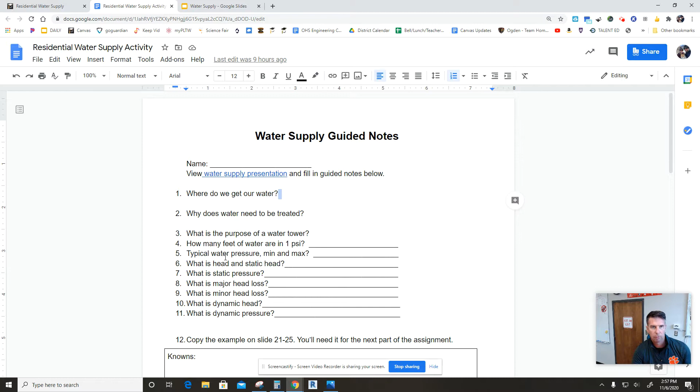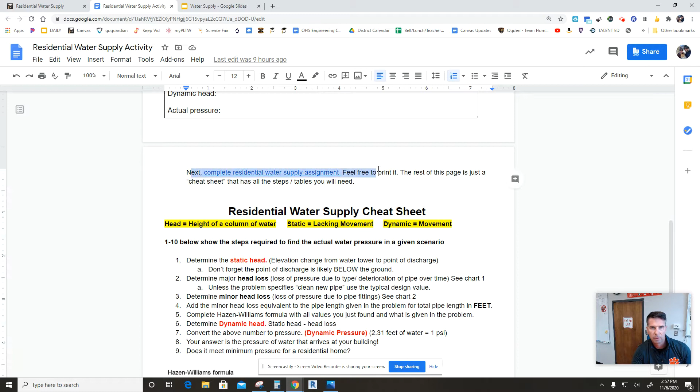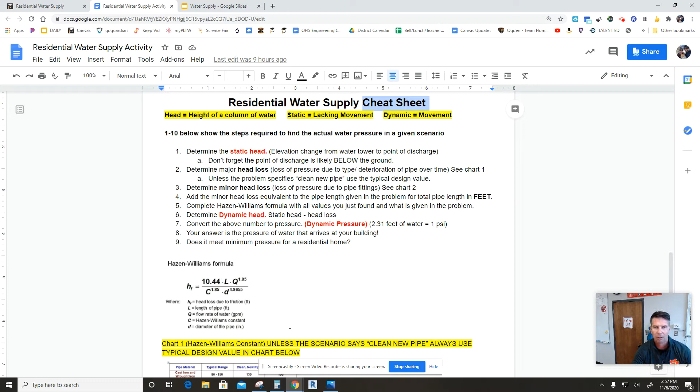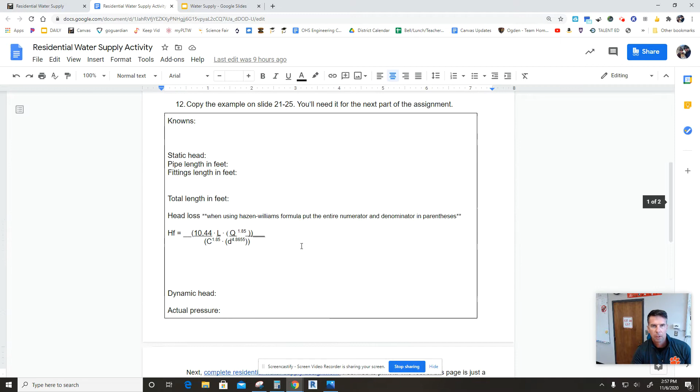So the purpose of this video is to show you what you're going to be doing and walk through the math portion. You're going to go through these guided notes, work through this example, and then do this assignment. Below is a cheat sheet, a step-by-step guide. This math is not hard at all, but I'm making this in case someone's not here. I want to go through one example with you. So if we go to the water supply presentation, I'm not going through the whole thing, I'm fast forwarding to this example, and that's what I want to walk through.

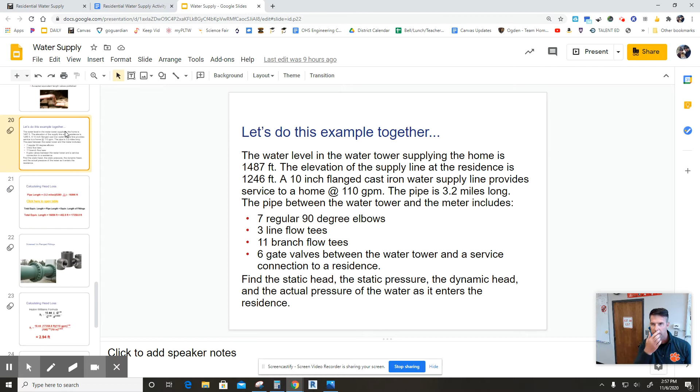You're given all this information about a water supply system. I'm assuming you've already gone through the notes. This is not going to make a whole lot of sense unless you go through the first part of the guided notes to get that background knowledge, so please do that first. We have our elevation difference, our type of pipe, the gallons per minute, how long it is, and all the different fittings. The goal of all this is to find the pressure at your faucet.

So that's what we're going to go through. We know it's 3.2 miles, and we're going to convert that to feet, 5,280 feet in a mile, of course. So here's our total feet.

Great, easy. Now the last slide gave us all this information about all these different fittings, and take note, it's a 10-inch flanged cast iron pipe. Let's find the first one, 7 regular 90 elbows. Let me back up for a second, because it says flanged pipe. Screwed fittings you see in much smaller diameter pipe. Flanged fittings have these really big bolts and nuts that hold pieces together. This might be a 2-foot or 3-foot diameter pipe, a really large pipe. If you've seen the big pipe in Ogden Canyon that delivers our drinking water from Pineview, that's a huge pipe.

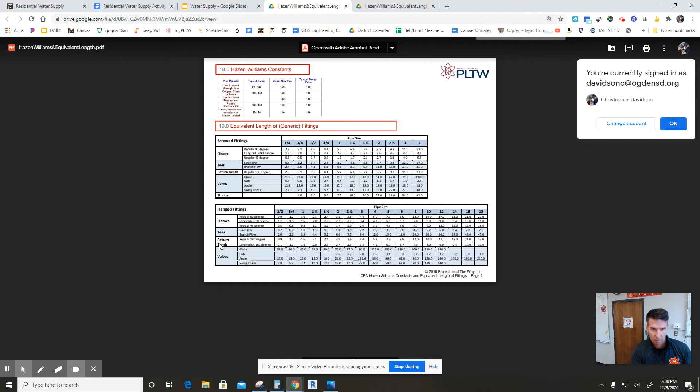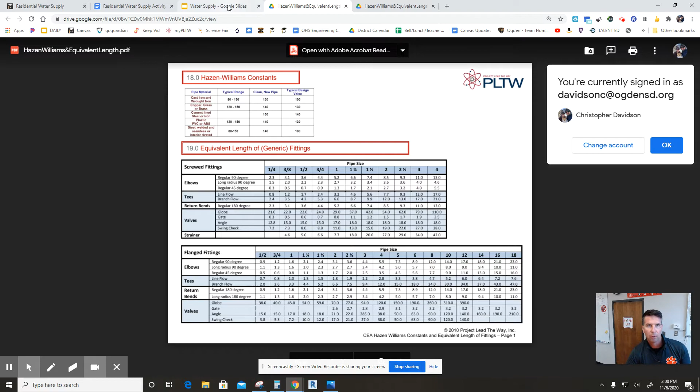So back to my table, notice flanged fittings here, screwed fittings here. It was a 10-inch, and right here - here we go. Here's our diameter, 10-inch, regular 90, just like a 90-degree bend, and that's going to add 14 feet to our pipe. If we go back here, there are 7 of them, so we do 7 times 14, and you're going to do that with all of these different fittings.

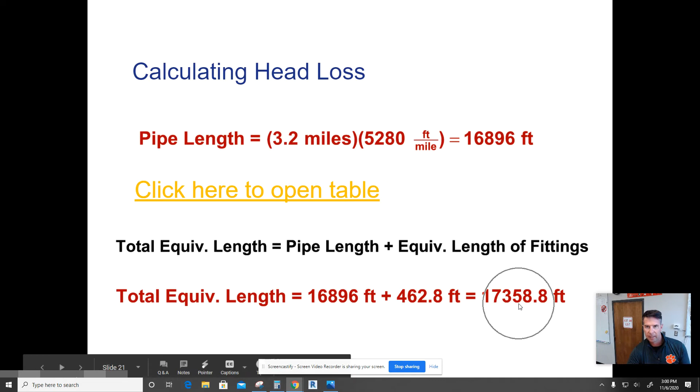So then what you do is take that 16,896, you're going to end up with 462.8 feet, and add that to our total length, because all those fittings end up creating basically feet of pipe. We're going to make turns, we're going to make 90s, and it's going to reduce the pressure and the force, so we have to take all of that into account.

So this equation looks ugly, it really is not. It's our Hazen-Williams formula, let's just jump in. 10.44 times our total length after we accounted for our fittings, that's this 17,000. Q was given, that's our 110 gallons per minute, raised to 1.85, easy. The denominator is what type of pipe we have - I'll show you that chart in just a second - and the diameter of pipe, and these two exponents are just constants in our equation. Let me show you.

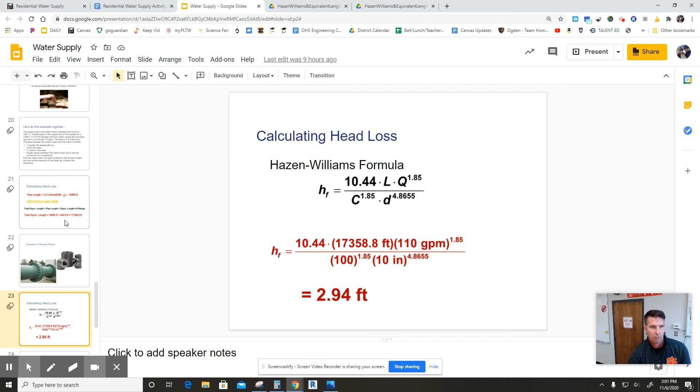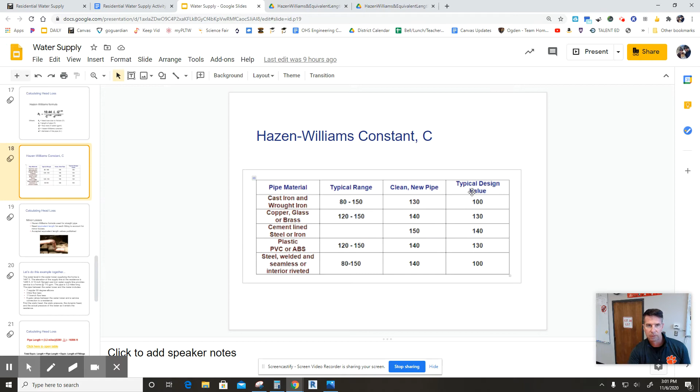So it said cast iron pipe, let's talk about that. Here we go, cast iron pipe. Unless the problem specifically says clean new pipe, then we would use this value. If it does not say it, and our scenario did not say clean new pipe, then we're just going to use 100, and that's this typical design value. Let's see where we were - yeah, see, cast iron pipe doesn't say anything about being new.

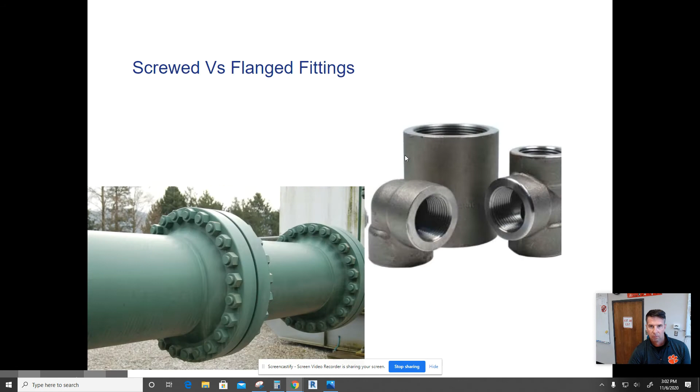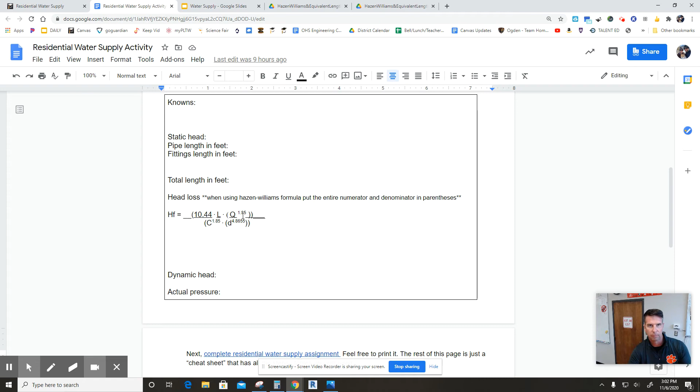Okay, we did our Hazen-Williams, did some ugly math, and got down to 2.94. There are some quiz questions on this, make sure you know how to do it. Back in your guided notes, right here - if you put your parentheses in exactly like this shows, you can get it right on the first go in your calculator and not have to do the numerator separately from the denominator and then divide them. Okay, getting sidetracked, here we go.

All right, we got 2.94. We're almost done, that's the hardest part. Also in the problem, it gave us the height of our water tower, and the elevation of our water tower, and the elevation of where this house or whatever is. So we take the difference and we get 241 feet. We need to convert that to pressure. Right now this is what we call static head, we need to convert that to pressure. So we convert that and we get 104 psi. 2.31 feet is equal to 1 psi.

So we take that 241 - this slide's a little confusing - we take that 241... yeah, you can really omit this step actually. Let me back up: take the elevation difference, then subtract what you got from Hazen-Williams. There's that 2.9, you get 238 feet, and then convert that to pressure. These are just showing two different things, don't worry about this step, it's dumb. So: elevation difference, subtract Hazen-Williams, convert to pressure, you're done.

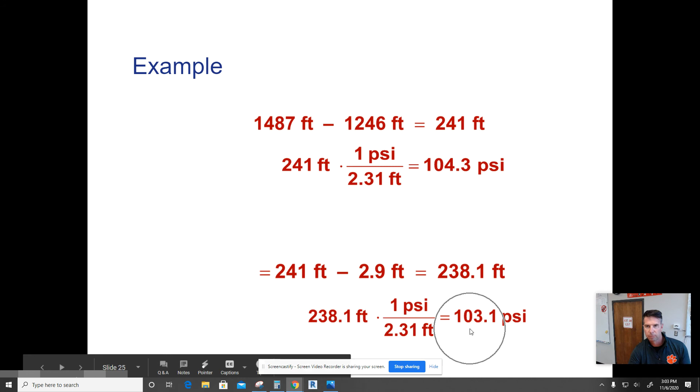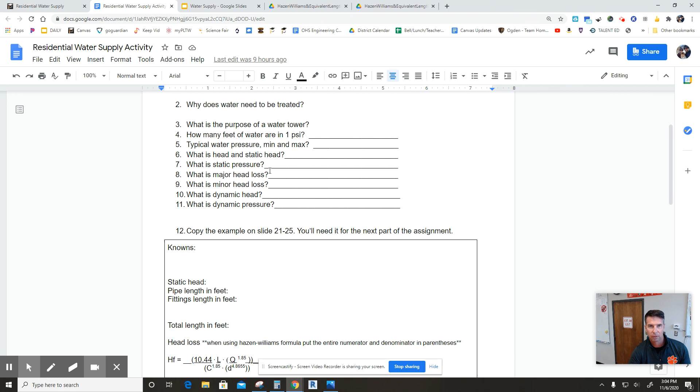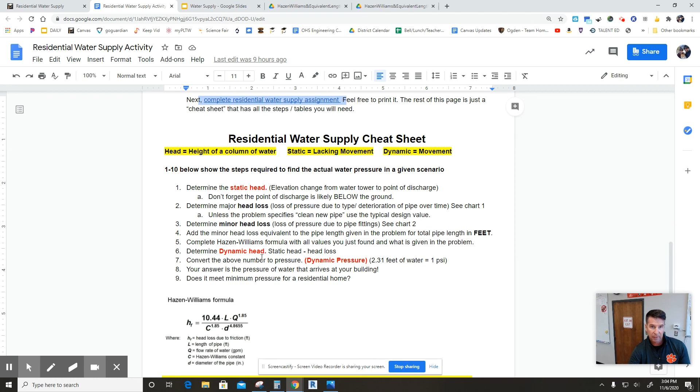So I just wanted to walk through one with you. It seems a little crazy at first, but it's really, really easy. You should have already done your notes, do this example, and I'll put the link to this video up here somewhere. Here's your actual assignment, and here's just a cheat sheet of basically what I just said. Also here are all of your charts and some links that you'll need - I tried to put all of that just on one document.